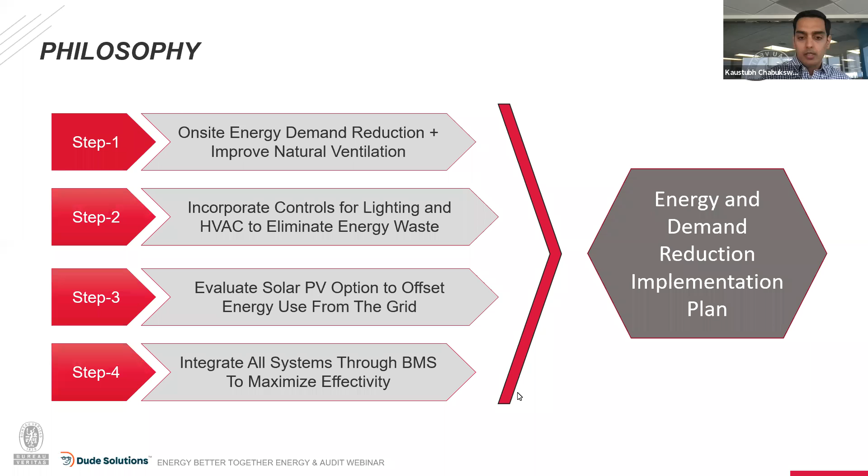The next slide I want to talk about is, how do we approach these problems? We strongly believe everything has three parts: start, middle, and end. So whether it's energy audits, energy management, sustainability initiatives, or net zero initiatives, phase one is understanding where you are. Phase two is exploring how you can identify measures to act on it. And phase three is to understand what measures we captured and how to prioritize them.

Phase one starts with understanding, where do I stand today? What's my benchmark? What's my greenhouse gas consumption? What's my carbon emissions? This is done by benchmarking your site. You may have heard this 100 times: what's your carbon footprint, where do you stand? Do you understand how many utility meters you have? What meters need to be disconnected? What meters are to be kept? What meters can be consolidated? What meters serve multiple buildings? Are you able to understand that of the one meter serving three buildings, which building is the worst performing? A lot of those questions get raised when you're trying to understand where you are at.

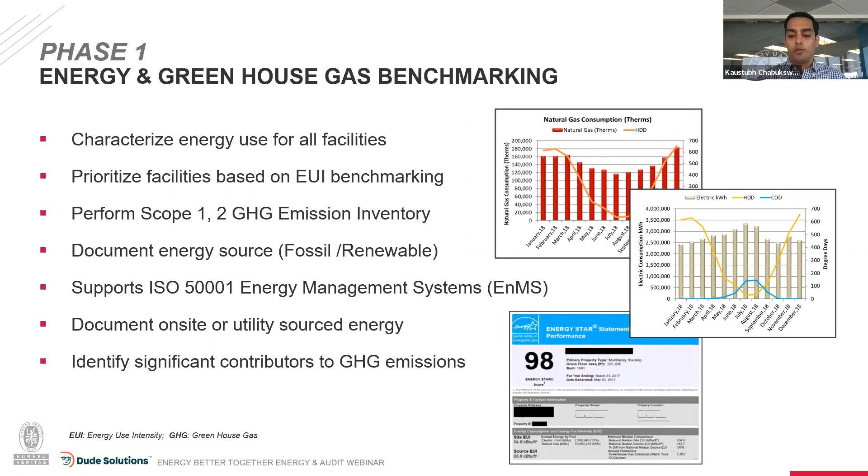So quite often, with these questions, we direct our clients to Energy Manager as a tool that can help, where you start pushing your data into this software and understand, okay, I have 7 buildings in my portfolio, I have 5 gas meters but all 7 buildings consume it. So you can attach those gas meters and accounts to each building, understand your consumption pattern, and start pushing data into Energy Manager so it can track your consumption year over year and understand this is how much my building is consuming year over year, and this is where I stand.

I see there's a question, but I'm just going to keep moving.

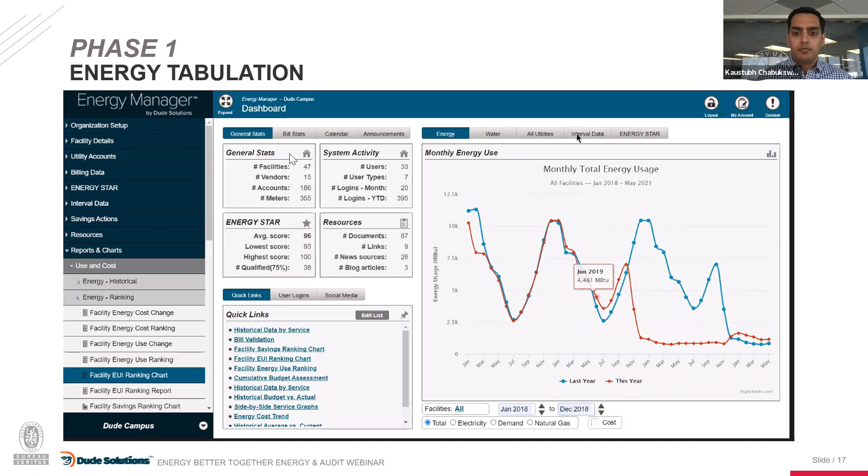One of the cool things about Energy Manager is, as you track the information, it can push your information into the Portfolio Manager side. Most folks on the call today should be aware of what a Portfolio Manager is. It allows you to benchmark and understand where your building stands compared to similar buildings in similar settings. Ultimately this is kind of a GPA score you get - how did you score on your test? For me, if I have a pot of money today to spend on energy, the most important thing is to understand where do I spend that money. Should I spend it on the building that's most obvious in terms of occupancy, or on the building that's the worst performing one? It depends on what your big goal is.

So the poll results are back. Are you tracking your central utilities? A good 55% of folks are saying they are tracking it, which is really good. A couple of them are saying they want to do it.

So we can definitely work with you on it. Ultimately, the first step in understanding how to go net zero or reduce your carbon footprint is to understand where you are. So what does this exercise provide you?

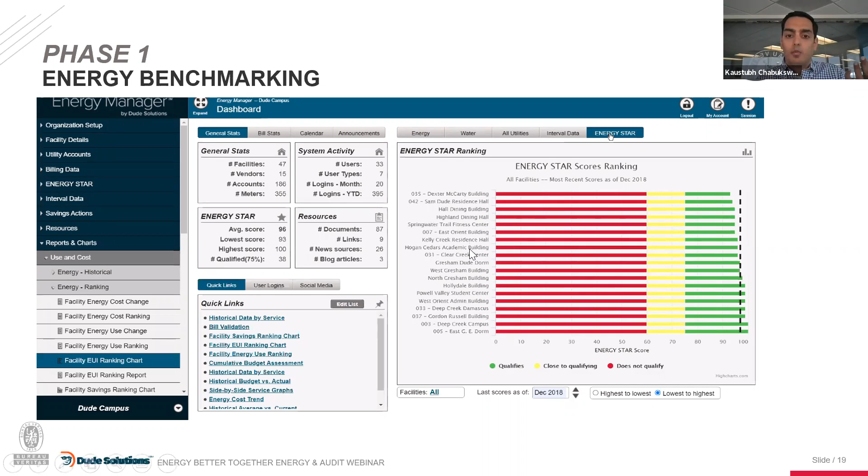This exercise provides you an understanding of energy use intensity. So how do you compare your barn to your office building, or your gymnasium to your research facility? Those are apples and oranges, different buildings with different end uses. But you can understand the energy use intensity, the energy used per square foot of your building.

And then it gets compared to standards of what your building should be consuming, and it allows you to rank buildings from worst performing to best performing. Energy Manager actually pushes and pulls data from Energy Star Portfolio Manager to understand and rank your buildings in a single platform.

This allows you to say, this is my worst performing building, this is where I need to put the most money in to reduce my carbon footprint. And this is the whole goal of understanding where you are today, which we believe is phase one of an energy project.

Hey Kaustubh, on that last slide, I think that's one of the key takeaways as far as I'm concerned. From a facilities point of view, as a non-energy professional, Energy Star might be confusing to you.

Like, I've got electric bills over here, gas bills over here, and a couple buildings off the grid that operate off propane. How do I compare those? And the answer is, this is exactly how you compare those.

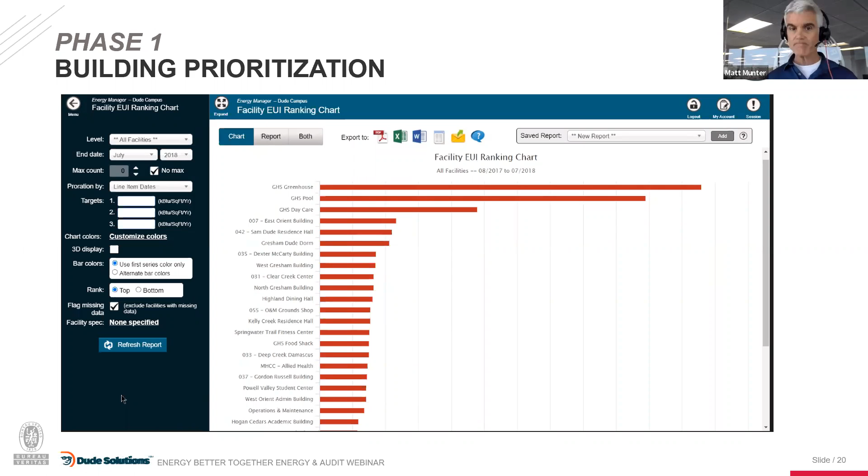Sorry to interrupt, I will silence myself for a minute.

That's all right. So once you have the problem charted, as Matt said, you can compare the buildings and understand your propane building versus electric buildings. This is where we send our field auditors and say let's do an energy audit on those buildings.

So the way we approach energy audit is we look at 5 fundamental aspects in a building. One, we look at the HVAC system, often called the heart of the building. It keeps the building running: heating, cooling, ventilation, cooling tower, boilers, everything included, plus distribution system, lighting, plumbing, envelope, and controls.

So if you attack your lighting and plumbing, which you may have heard from a million different people by now, that's your biggest bang for buck, because your lighting runs almost 12 hours a day. If you can save on it, you save big time. HVAC has a longer payback; lighting and plumbing have a smaller payback.

So altogether, when you look at an energy audit that we put together for you, it's going to address all 5 aspects so you can get a holistic viewpoint of all the opportunities you have in the building to reduce your energy use.

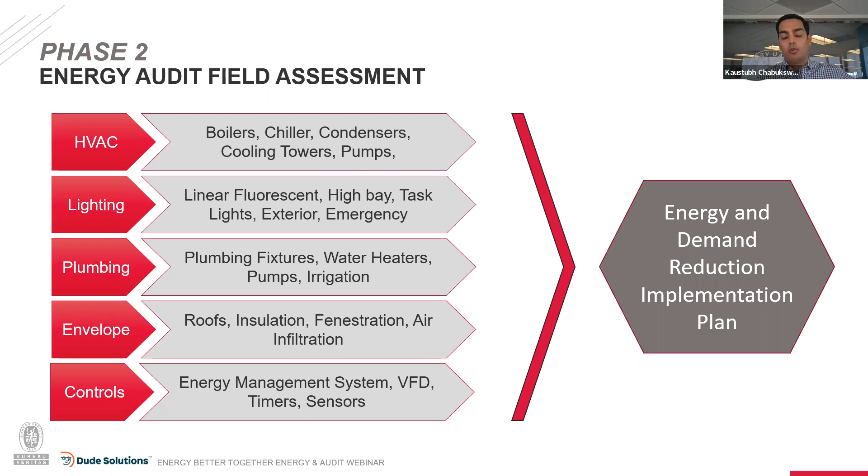Whatever your end goal, whether reducing carbon emissions, cost savings, or meeting a certain goal, at the end of the day you want to see all the different savings we come up with. Most important is understanding how those savings get calculated.

So once our guys come back from the field after collecting information, we start crunching numbers through in-house developed calculators that we've been developing over the last 11 to 12 years, where all the inputs come in. We publish those calculators in the appendix of the report so the client can look at it and follow it logically to see how the savings have been generated. We also use some DOE-generated calculators for PVWatts, for solar generation, so our analysis is in line with industry standards.

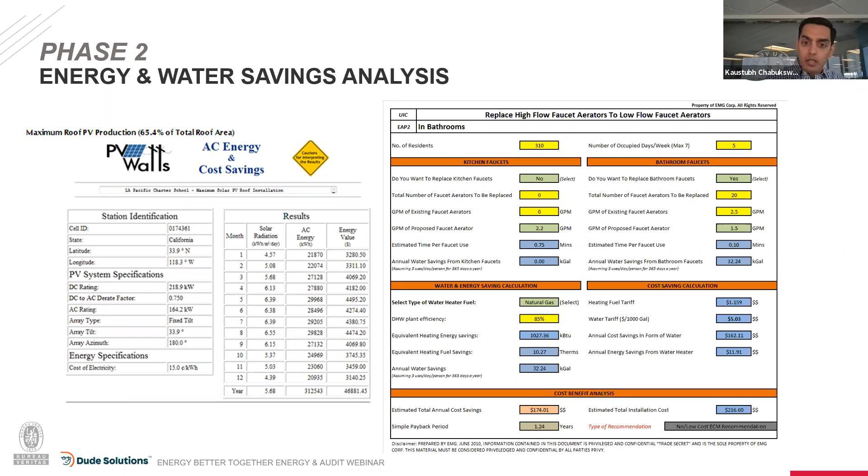Ultimately, once all these calculations are done, we synchronize it and put it together in a simple to understand ECM table. The table provides you what your measure is, where it's applicable, what's your initial investment, what's your savings by fuel type.

This is kind of critical for net zero, to understand savings by fuel type. Then we provide you one of the key factors like total greenhouse gas savings by each measure. So if your goal is to reduce greenhouse gas emissions by a certain percentage, you can start picking off items which have the highest bang for the buck - which items will provide the biggest greenhouse gas reductions. You can choose those.

And we provide you the simple payback. And most important, what we provide you is the savings to investment ratio, which is also called the profitability index - meaning that if I invest $1 today into a measure, will I make my money back within the life of its improvement?

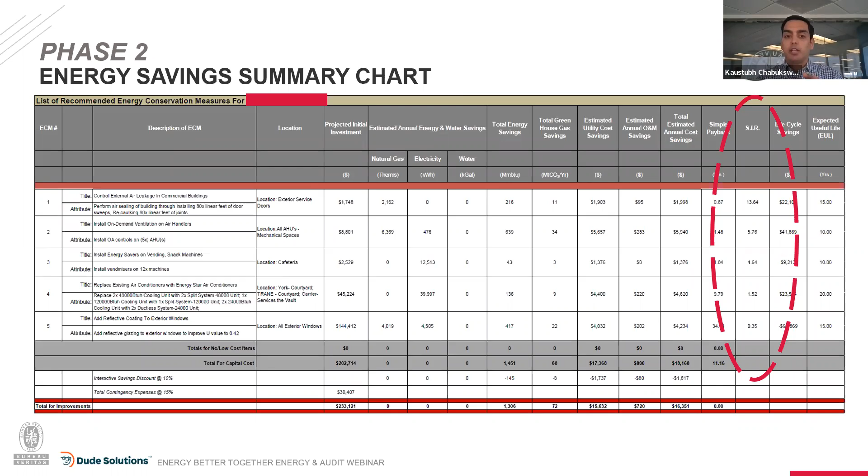So one of the key things we do is the ECM table I just showed - we push this information into the energy manager software. The goal is to have a single platform where you have your energy consumption, your benchmarking, your potential energy measures, and the platform also links your potential incentives to your measures. This allows you to say, okay, I have around $65,000 of lighting improvements - where can I go to figure out what incentives are available?

So you can click on the link and say, this is the state I am in, this is my utility provider, these are the incentives I have which I can tap into. That allows you to understand what your net initial investment is going to be - net meaning minus the rebates and incentives. So this is where the whole tabulation comes into play.

And as we enter phase 3, it's about understanding how to prioritize. Dan is going to talk more about how you move those ECMs around. Dan, you want to take over from here?

Yeah, absolutely. Now that we've painted the picture of phase 1 - taking the snapshot of where our portfolio is today, most inefficient - and we've gotten BV&A on site to perform an audit of those facilities and understand what measures we can do, like Kaustubh was saying, those measures are loaded into the software. So now you're getting a fuller picture of how software and services play a role.

And not to beat a dead horse, but when we talk about how to prioritize projects, this is where setting goals as an organization is critical. We've got to know what we are working towards. Our goals could be public relations related.

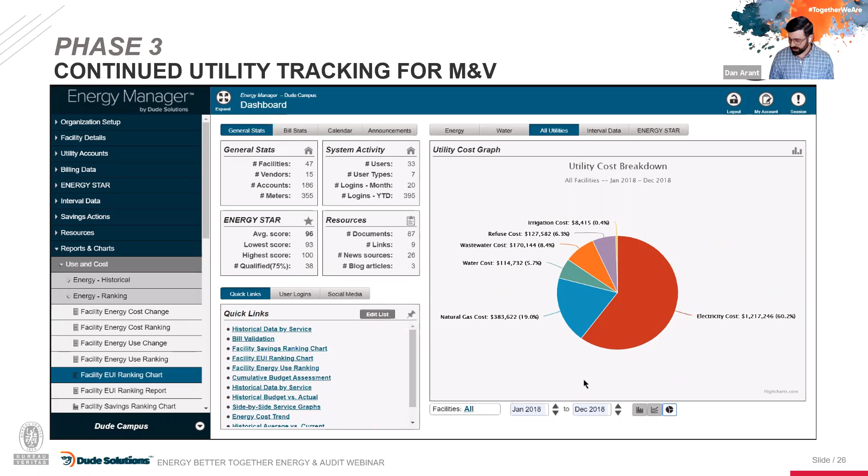So I think this is where we're really going to talk a little bit more about the sustainability side when we talk about net zero cost. So I think we're coming back to you. Yeah, that's right, so let's talk about net zero.

Some of you guys mentioned that you have net zero goals, and we did talk about this earlier. What exactly is net zero? Net zero is somewhat a loosely defined goal where everyone has their own way of interpreting it. If you look at the textbook definition, it means that if you emit, let's say, 10,000 metric tons of CO2, you may want to reabsorb 10,000 metric tons of CO2 back so that your impact is zero. That's the true meaning.

But a lot of clients interpret it as minimizing their impact to almost zero carbon emissions, so it's open for interpretation. Further, there are scope 1, scope 2, and scope 3 emissions. A lot of clients say they're going to primarily focus on bringing scope 1 and scope 2 emissions to zero, meaning emissions from procuring utility from the grid, and emissions from operations of the building such as boilers or rooftop package units. But scope 3 is vehicular operations and other ancillary utilization, and that's still not been brought into net zero yet for most clients.

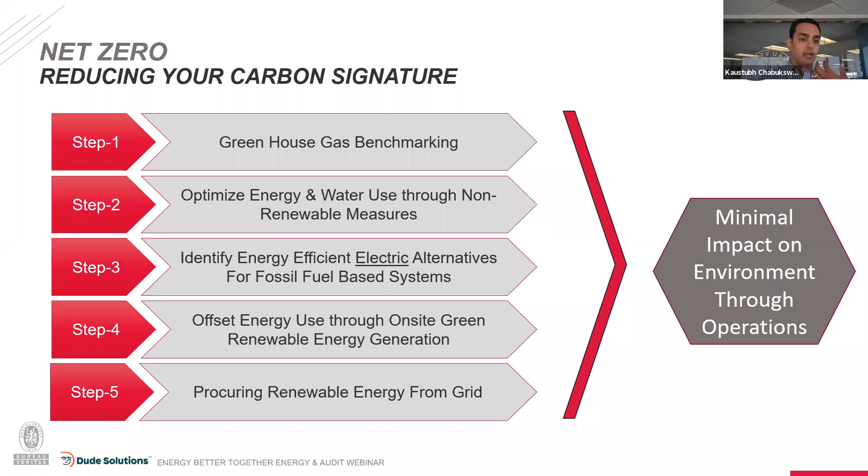So again, it's the way we look at it. A lot of our clients have accepted this as the method to go forward with, because they care about the impact they're leaving behind. But at the same time, it's essential that the way we address it should be cost feasible.

Okay, so with this, let's talk more about the federal stimulus funds that are coming down. Matt is going to talk more about this as we go.

Thanks, Kaustubh. Hey, before I do, was there a question in the chat? Should we answer that now? Someone's asking in the Q&A about software for energy audits—DSI, we're talking about Energy Manager software here. This is what we use in our practice: a homegrown package similar to a facility assessment package, where we look at the existing equipment. As far as how we set a client up to get utility bills in, it's the Energy Manager software, and Dan can speak to that.

Anything to add, Dan? Yeah, I'd say along this process there's the tracking of utility data, the benchmarking of your buildings, and on the back end, in the context of this conversation, the measurement and verification of those ECMs that we implement—that's what I would add. That's a good one.

Cheyenne, you're monitoring the chat—there's one more question from Mark here. It says: how do you account for utility companies that have an energy mix that still includes fossil fuels? Building electrification only makes sense if the electric provider is fossil free—which is actually true, right?